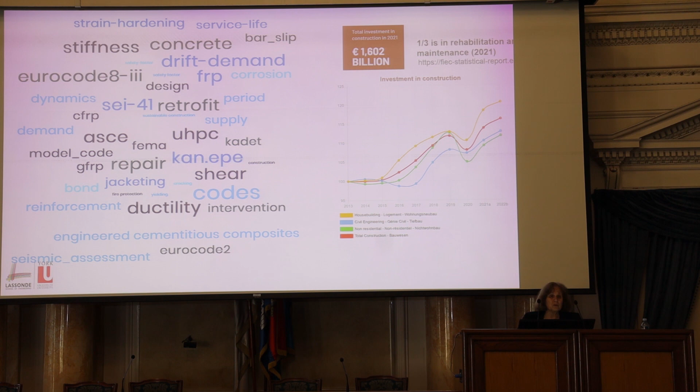However, the topic is a little bit on the graduate level for civil engineers graduating from undergraduate programs, and there is a lot of jargon out there from the various codes, approaches, and material industries. Therefore, to avoid some of this confusion, or to use a benchmark for further discussion, I want to begin this presentation with a few key points of reference.

Because the presentation is related to seismic retrofit, to seismic engineering, I wanted to first begin with a simple reference point: what matters in structural seismic response. Let's figure out first what matters in structural seismic response so that we may be able to see how we can fix existing structures with the opportunities provided by novel materials.

For a given earthquake and soil condition at a given city or site, we have the demand, that is, what the earthquake will require of the structure. This demand is usually described in the codes in the form of an acceleration response spectrum. On the horizontal axis, we enter the spectrum with the period of the structure, and on the vertical axis, we read off the acceleration that will happen at the top of the structure.

This, multiplied by the effective weight of the structure, tells us the force that the structure will attract during the earthquake. But the force is really not as significant as the amount of deformation the structure will develop, because that deformation tells us how much damage the structure will endure.

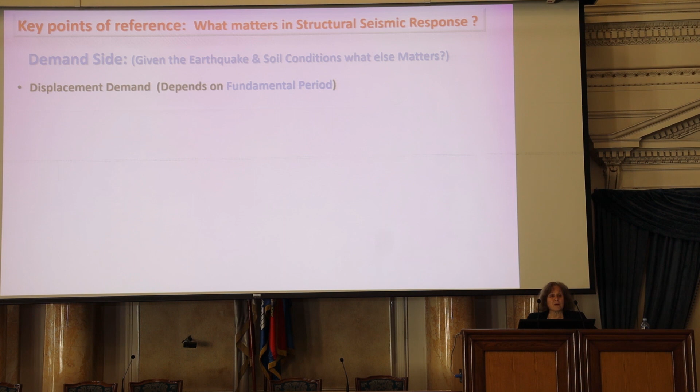That displacement is what we use as a criterion to anticipate the magnitude of damage the structure will develop. That's the first key point of reference. Given the earthquake and soil conditions, we have the displacement demand - what the earthquake requires of the structure in terms of displacement. Another important attribute of the seismic response is how the structure takes that displacement.

This is represented by the shape of lateral vibration, usually well approximated by the fundamental mode. Although it's not actually the fundamental mode of response, it does relate to it. If you see large concentrations of displacement in a single floor, you know that floor is where you anticipate damage. So the shape of lateral response tells us about the distribution of demands throughout the structure, and therefore the tendency for localization of damage.

Localization is a bad word in seismic and earthquake engineering. Anything that localizes means it's taken by one point in the structure altogether, and therefore that point will suffer while the rest of the structure just looks on.

So the morphology of the structural system determines both the fundamental period, which determines the displacement demand, and also the shape of lateral response, which determines the tendency for localization of damage. That was the demand side. In earthquake engineering, we're also interested in the capacity side - how much deformation capacity the critical locations with large deformation demands can take.

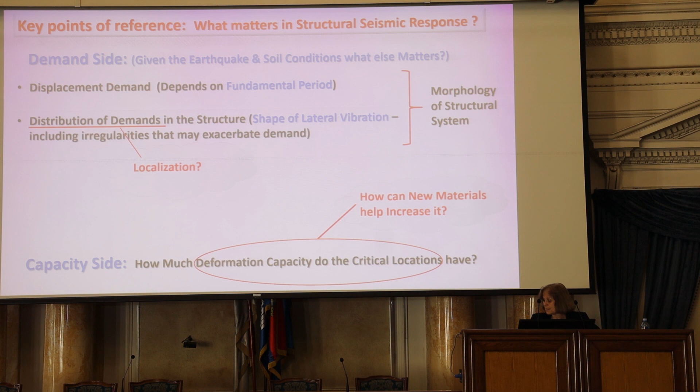This is where new materials can help us. How can new materials help increase this deformation capacity?

To understand the practical illustration of what I've been describing, consider these two houses. They were built in the same period in a part of Greece damaged in 2008 by a local earthquake, with the same method, technology, and period of construction. However, the bottom structure, which totally collapsed, had its lower floor without infills, whereas the upper structure was infilled in the lower floor.

Both were subjected to the same earthquake, and it was determined that the top structure had a period of about 0.2 seconds. Entering the spectra - the top is the acceleration spectrum, the bottom is the displacement spectrum - we see that in terms of acceleration this structure would demand about 40% of G, so the base shear would be 40% of G times the effective weight of the building. However, the displacement would be very small, less than 5 millimeters - so that's a very small displacement.

Whereas in the lower building, the period would be estimated at about 0.55 seconds - very large for a two-story building. Looking at the spectra, the red line at the top acceleration spectrum shows about the same demand in terms of acceleration, therefore the same force. However, the displacement would be 30 millimeters, and the columns of that building in the critical floor were not able to take these 30 millimeters.

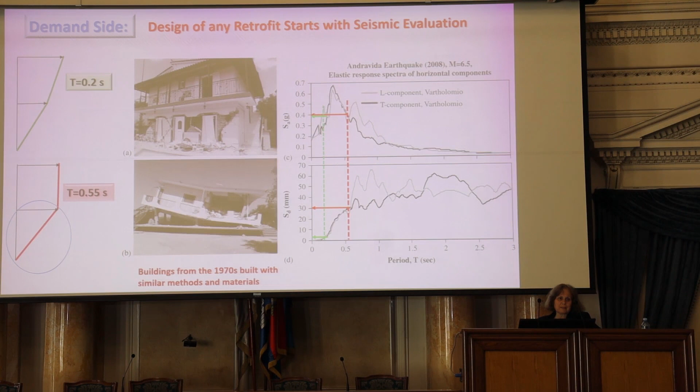The green shows the shape of lateral vibration of the top building. The bottom shows the shape of lateral vibration of the lower building. You see the concentration of the demand. This is the bad news.

In terms of retrofitting, when we start the process of retrofitting, the first job we need to do is to assess the structure, to evaluate it, to anticipate what it will be demanded to do during an earthquake.

There are two ways to go. One is to develop global interventions where such are needed, only if needed, with the goal to reduce the seismic demands. How? By addition of stiffness. When we add stiffness, we always add strength. Stiffness and strength are two sides of the same coin, you can't have one without the other. So by addition of stiffness and strength in critical locations, you can reduce the period and therefore the displacement demand.

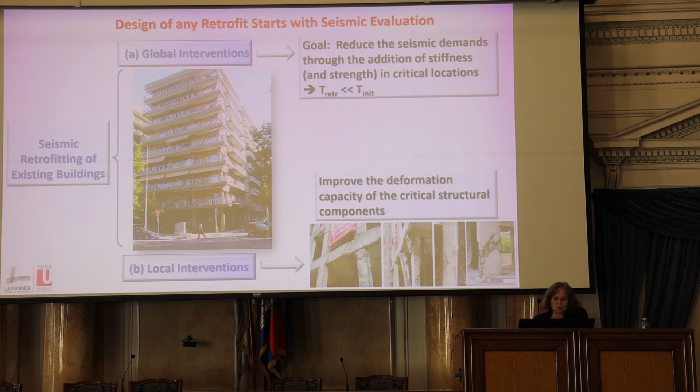The other approach, if needed, and usually that is always needed in older structures, is local interventions with the objective to improve the deformation capacity of the critical structural components. When you do global interventions, you usually improve the deformation capacity too, but that's not always the way to go, because global interventions are very expensive and intervene throughout the building, disrupting its normal function.

So we need diagnostics to determine which way to go. Should we go for global interventions? Are they needed? Or should we just stick to local interventions? What are the available diagnostic tools we have?

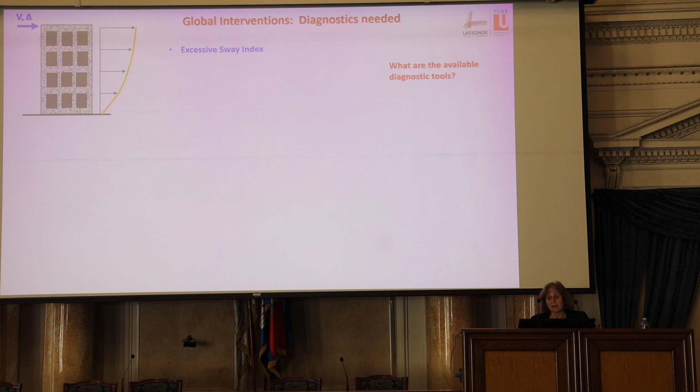The first you have already learned in your undergraduate reinforced concrete design course, with no mention of seismic design at all. It was called the sway index of a building. You all learned to calculate the sway index, and that's the most reliable diagnostic tool for earthquake engineering, for the assessment of a building. If a building is a sway type building, then it needs stiffness, it needs global interventions.

Another tool you have is to check the magnitude of the period. If you have an excessive, large period, then definitely you need to bring it down. You need to reduce the period. How do you measure the period?

There are instruments you can take to the field, place on the building, and read the period under ambient vibrations, usually generated by a truck passing by. You need to increase these magnitudes, because the actual structure during an earthquake will open all its cracks, whereas when the truck passes by, the existing cracks will not open. We do that by multiplying the measurement by the square root of 2, to account for the fact that the stiffness of the structure is reduced by 50% when an earthquake occurs.

So this is, for example, a multi-story building which was measured with the instrument placed on site. It was found that the period is 0.56 seconds. That's very low, of course, and the owner was very happy, but we are not allowed to stop there. We have to multiply by the square root of 2 to account for the fact that in an earthquake event there will be much larger intensity vibrations. So we end up with a period of 0.8 seconds.

That's less than 0.075 times the height of the building to the 3/4, which is the old calibrated expression that the Eurocode gives as anticipation for normal periods for such buildings, or the new Eurocode, which is being developed right now, which says we should go with 0.05 times h to the 0.9. In both cases, this building passes. So this building does not need global interventions.

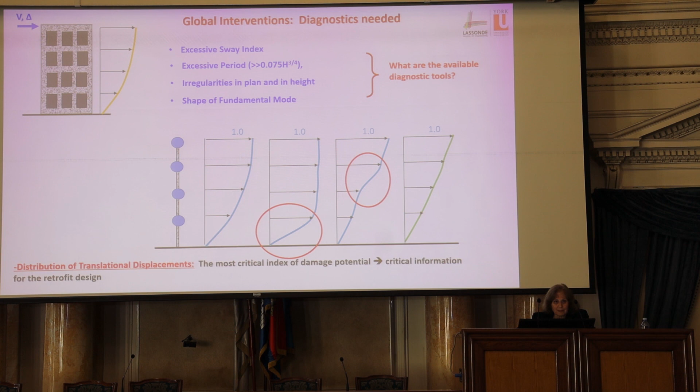Another way is to look at irregularities in plan and in height. If we have irregularities, there is a good chance we may need global interventions. And we can always calculate or measure, by placing the accelerometer at different heights of the building, that accelerometer I showed earlier, the shape of the fundamental mode. If you see irregularities in that shape, you know something is bad, because this is the most critical damage index. It tells you the potential for damage in the building.

A sudden change in the translational shape of vibration of the structure is the most significant effect on the generalized stiffness of the building, and therefore on the period, because the period of the building depends on the stiffness, on the generalized and the effective stiffness.

For example, the typical lateral stiffness calculation is done as follows. You take the stiffness of every floor, which comprises contributions from columns, from walls, and from infills. You sum those up, and you multiply them with the change in the lateral shape that is happening in that particular floor, but that goes squared.

And that creates a paradox in earthquake engineering: the weakest, softer part of the building controls the stiffness of the overall system. So if you have a floor that is weak, that is going to control. It's like Murphy's law: if anything can go wrong, it will. So if you have a soft story, a story where you have greater localization of deformation, that really represents the stiffness of the entire building.

So in this particular case, delta phi is the change in the lateral shape that is happening in the building, and it's happening in the lower floor. It controls the stiffness of the entire system.

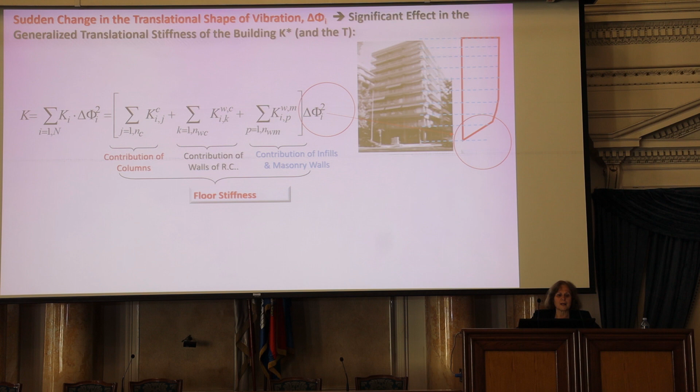So in redesigning the building, we have as a goal in a global intervention to modify the translational shape of vibration to a targeted shape, a shape that we like, in order to eliminate the tendency for localization. The more uniform the distribution of seismic demands that we will get, the better will be the response.

So what do we do? We have a good feeling of what the period should be. The Eurocode tells us what a period should be for a building of a certain height, so we can start with that. That's a good target value. If we are way above that limit, then we need to stiffen the building. So we can target the value of the period to be close to the value of the Eurocode.

That will allow us to estimate the effective stiffness, and then if we remember that the effective stiffness is the sum of the floor stiffness multiplied with the shape change squared, we know then what to change.

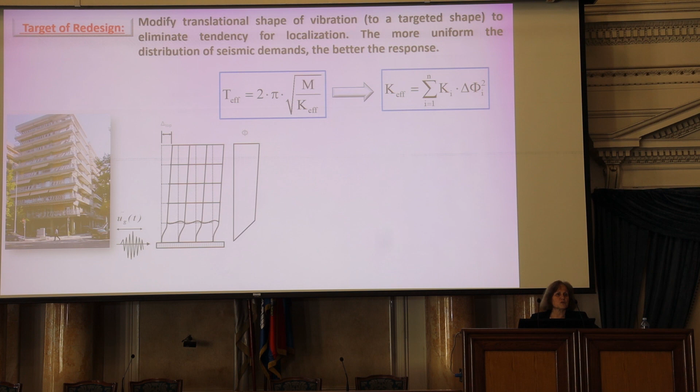And actually, the best thing is to aim for a uniform shape. Of course, we will never get exactly to the uniform, linear shape. But the closer we get to it, the more expensive the solution, so everything has to be done within reason. As a general guideline, we aim for a uniform distribution of strength and stiffness among the members in any given story in order to minimize the tendency for localization.

Here I show you the spectra that you saw earlier, but now I've plotted them differently. The vertical axis is the acceleration, the horizontal axis is the relative displacement, which you remember how we calculated it. The green region is the acceptable region of design. The green line represents the building with a period as per the Eurocode.

The yellow line represents a lower bound of acceptable design, the maximum value of period we are prepared to accept. The red line is the slope related to the period of a poorly designed building that we want to fix. So what we want to do is take this red line and bring it counterclockwise to fall inside the green region. The closer we go from the yellow to the green line, the better the retrofit.

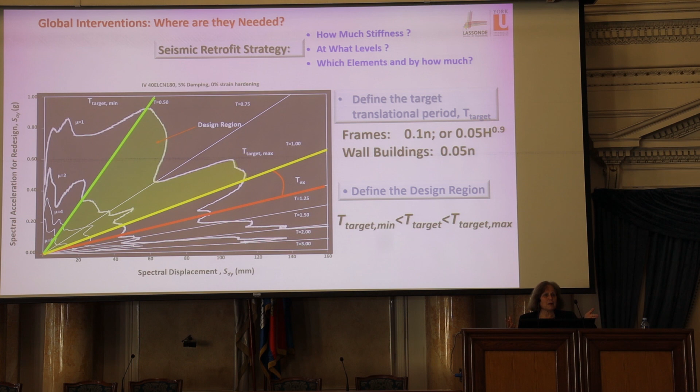So what should we target? We can target, for instance, a period for frame buildings of 0.1 times the number of stories, or we can target the period of the Eurocode. For wall buildings, we have to go to smaller values. And if we target this, and also decide what's the maximum allowable period we are prepared to accept, that defines for us the design region.

Having defined the design region, we are now about to design global interventions, and the question we need to answer is: how much stiffness to add, what should we aim for, and at what floor levels?

These graphs show what is the required effective stiffness of a multi-story building, and the dots correspond to different numbers of stories, given the period which enters the horizontal axis. So, given the period that you want, you can determine what is the effective stiffness for this particular building. Of course, this corresponds to a unit mass, which you then need to multiply by the actual mass of the building in order to convert it to a stiffness value.

And this here is a ready-made graph that you can use in order to determine the stiffness of the second floor compared to the first floor, the stiffness of the third floor compared to the first floor, the stiffness of the eighth floor compared to the first floor, that you need to add in order for the structure to have no problem in terms of seismic response.

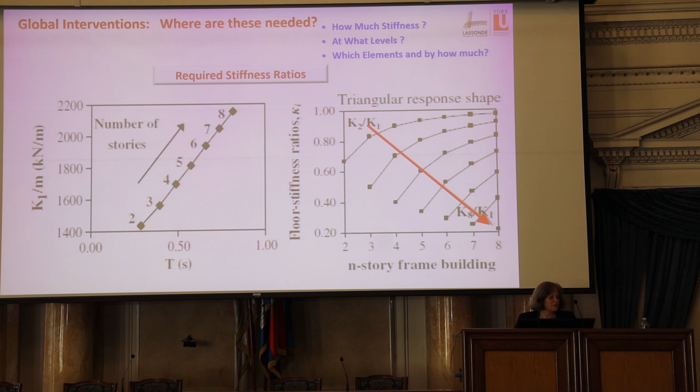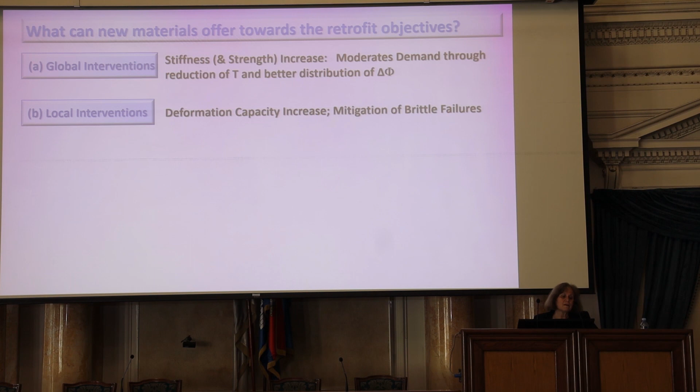Then the question comes: what can new materials offer towards this retrofit objective? What kinds of materials do we have at our disposal? Well, we have a number of new materials.

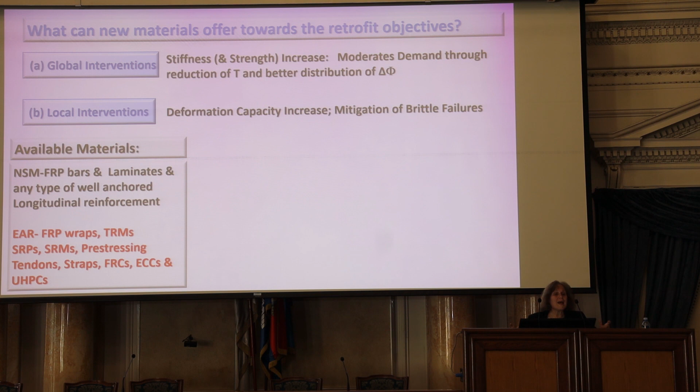First of all, we have FRP bars, which can be placed inside grooves - we call these near surface mounted bars. We have laminates, which can be introduced externally and anchored on a structural member. That's addition of longitudinal reinforcement, and any type of well-anchored longitudinal reinforcement will do for a global intervention.

For local interventions, we have what I have written in red: externally applied reinforcement in the form of FRP wraps, TRMs (Textile Reinforced Mortars), SRPs (Steel Reinforced Polymers), and SRMs (Steel Reinforced Mortars).

The steel now comes in the form of wires, pre-stressing tendons, straps, FRCs (Fiber Reinforced Concretes), Engineered Cementitious Composites (ECCs), and the most recent addition to the group is ultra-high performance concrete. These are concretes of extremely high compressive and tensile strength.

What are the available methods? We said that in a global intervention we now know exactly how much stiffness to add on every floor. What methods do we have? We said jacketing, but jacketing means we are changing the member dimensions. What else do we have?

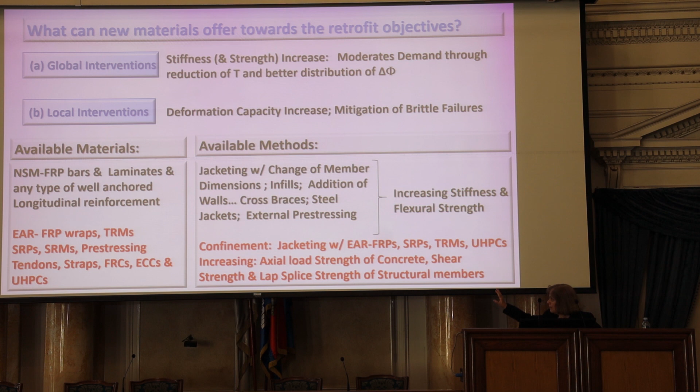We have infills - these are traditional approaches. We have addition of walls. We have cross braces - a very nice solution, particularly for certain kinds of building uses. Steel jacketing or external pre-stressing. All these methods written in black lettering increase stiffness and therefore strength, and therefore represent global interventions. In red, which are local interventions, we have confinement.

Confinement is the essence of a local intervention. So what do we have? We have jacketing with externally applied FRPs, SRPs, TRMs, or UHPCs. If there is time at the end, I want to talk to you a bit about UHPCs, because this is the future in retrofitting.

And what do we use them for? Well, we use them to address all the undesirable modes of failure in the building and also to increase the deformation capacity of components. We have a huge selection of materials right now in the category of FRPs, SRMs, SRPs, and TRMs.

The P, the last letter, stands for polymer, so you can have fiber reinforced polymers, steel reinforced polymers, or textile reinforced mortars, which are the TRMs, steel reinforced mortars - again, these are the SRMs. And they come in a great range: we have carbon, glass, basalt, aramid. We even have geonets, which are ideal for low-strength materials such as masonry, comprising polyethylene or polypropylene products.

The FRPs can come in the form of laminates, bars, pre-stressing tendons, and impregnated matrices - the matrices you see with the voids. So we have a huge selection, and before we talk about how we use them, let's quickly review some of the characteristics in terms of the durability of these materials.

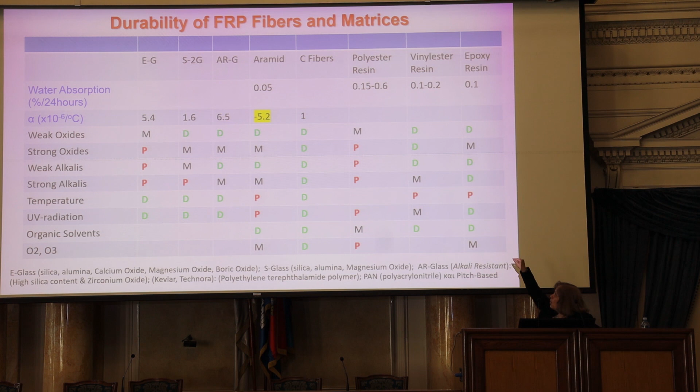In the horizontal line at the top, the first five columns represent the various types of fibers. Basalts are missing, but they are very close to glass. So we have E-glass, S-glass, AR glass (alkali-resistant glass), aramid, and C fibers (carbon fibers). The last three columns represent the various resins used to impregnate these materials, and the left column gives the various aggressive agents these materials need to resist. For instance, one is water absorption - we don't want our material absorbing water.

Their resistance in weak oxides, strong oxides, strong alkalis, weak alkalis, their response to temperature, UV radiation, organic solvents, and resistance to ozone. All these are considerations. I also give you the coefficient of thermal expansion, because that's important, particularly if you're embedding this material inside concrete. All our life up to this point has been based on the ideal marriage between concrete and steel, because they have the same coefficient of thermal expansion. But now with these materials we have to think, because they don't have the same coefficient of thermal expansion. Some may even have a negative coefficient.

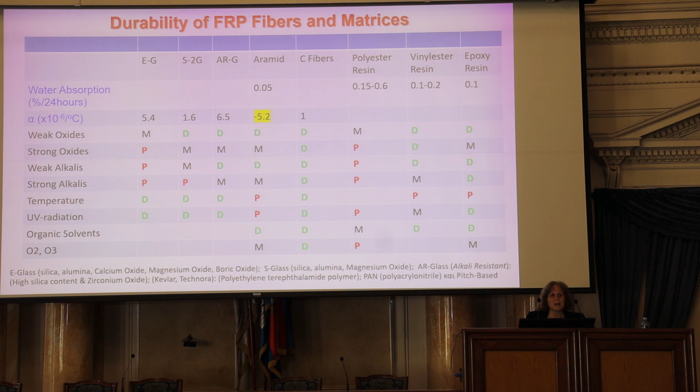So there is a color code here. The green letter D means that the material is durable to that particular aggression. The red P is that it has poor performance to that particular aggression, and the black M is indifferent, an average. By just perusal of the table you see that the best materials are, of course, the carbon fibers embedded in epoxy resin. So these are the best versions. Not that the others are not usable, but you have to worry about their resistance to various aggressive environmental agents.

So I said we have various materials. What they can be classified on is, of course, the matrix in which they are impregnated. For instance, we can have polymer matrices. These are very fast retrofits. The only problem they have is that sometimes they have a shorter service life.

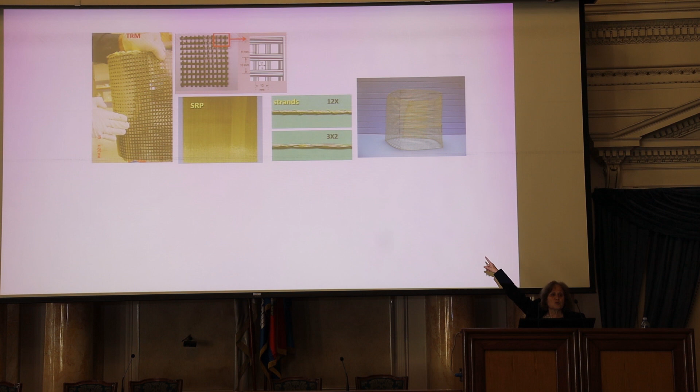And then we have mortars for matrices, which are inorganic materials. They are cementitious, and in these the various FRPs, TRMs, SRPs, etc. are impregnated. They have better durability and resistance to fire. These are typical fabrics that fall under this category, and you see also the metal strands which correspond to the SRP. The SRP is also shown in the next, second, lower picture. And here is the SRP after removal of a few strands, in order to make it perform like TRM, to be impregnated in cementitious materials.

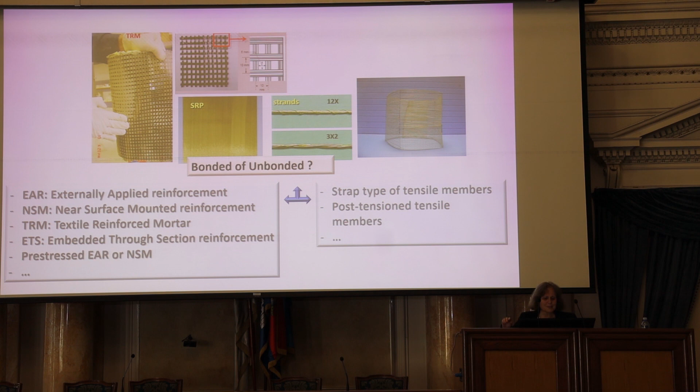And then you can have them bonded or unbonded. These are different ways to classify them. I already talked about near surface mounted solutions. If you are adding a lot of reinforcement, better use this option. And externally applied reinforcement, which is particularly useful when you do either external adhesion of laminates or wrapping around columns. And then you can have other solutions where you use straps or tensile members around the member that you want to retrofit.

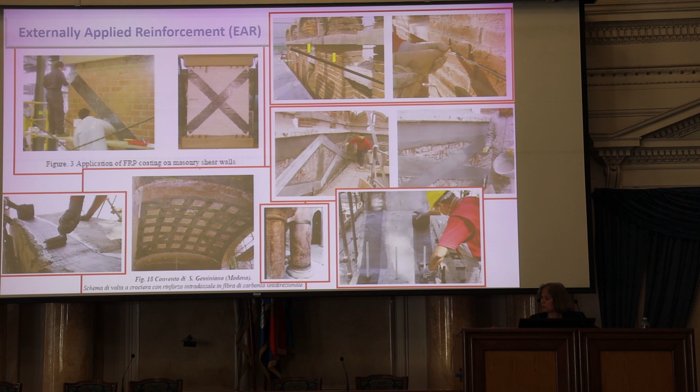These are images from different solutions, different applications. I'm sure you have seen several of those in the literature, and these are again solutions on masonry structures. I want you to remember that masonry can also be retrofitted in the same way. Here are some various solutions on masonry walls, because masonry is particularly useful.

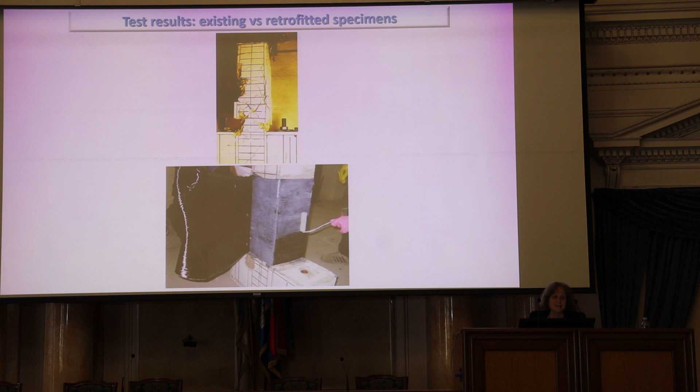Then we also know that they perform very well as jacketing devices for retrofitting of reinforced concrete elements. Here is, for example, a very highly damaged column with, you see it at the top, it has been damaged under cyclic load and then retrofitted below with CFRPs.

The problems become when you have flexural yielding in the first phase of response with extensive yield penetration inside the footing, which you have to do something about before you retrofit.

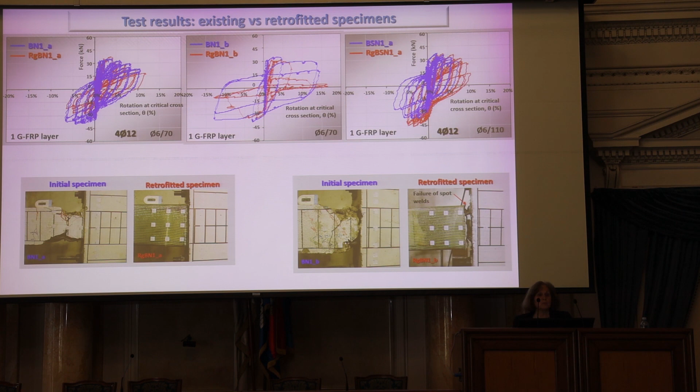This figure here shouldn't move. How do I show this? Maybe with this, right? Yeah, okay, sorry for this.

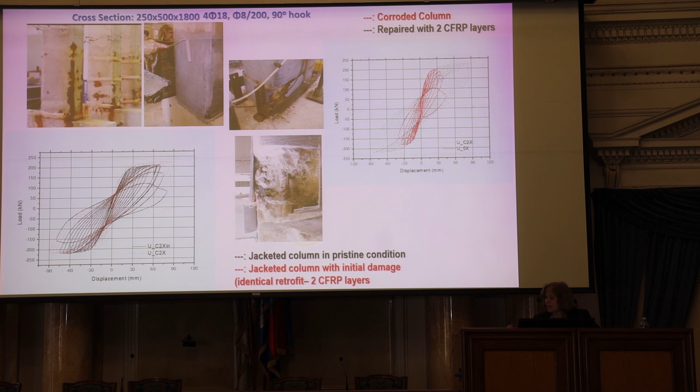Similar experiments were conducted on larger scale columns. The figure at the bottom shows in fine red line the behavior of a jacketed column, identical to the one shown in black, but the black one was not corroded. The red one was corroded significantly and then jacketed with two CFRP layers, and the response under cyclic load was significantly improved.

Now, all this experience, all this information has been going on for at least 20 years. There has been intensive research for at least 20 years, and it has been collected in the most recent FIB report on FRPs, Bulletin 90. The previous bulletin, Bulletin 14, was published in 2001. So there has been a lot of water under the bridge over these years, a lot of information collected. This bulletin represents the benchmark reference document for the development of the provisions of Eurocode 8 Part 3 referring to FRP.

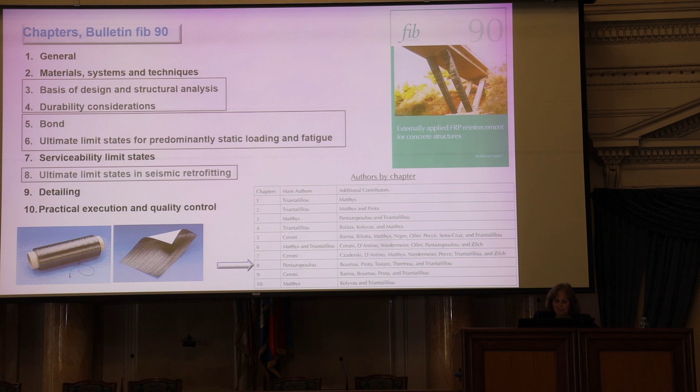So it's a useful document in order to see how the new code is going to approach this problem. Bulletin 90 comprises a number of chapters, including information on materials, the basis of design and structural analysis, durability considerations, bond, ultimate limit states for predominantly static loading and fatigue, and serviceability limit states. Chapter 8 is what we wrote on ultimate limit states in seismic retrofitting, and then there is a chapter on detailing. So I will just go very briefly over the chapters.

How are we doing in terms of time, Svetlana? We are okay? Yes? Okay.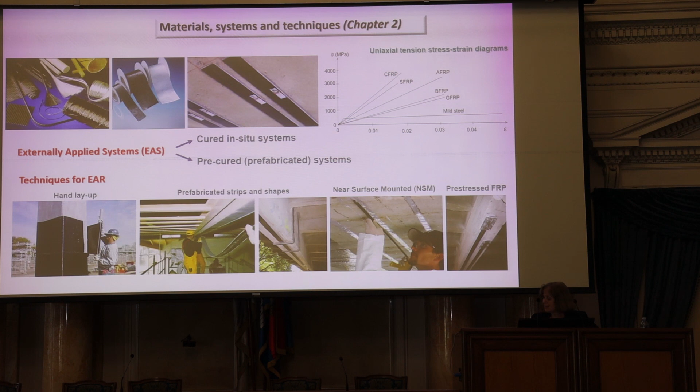There is lingo related to the way we apply the FRPs. For externally applied reinforcement, hand layup is what you see at the left, where they wrap a column. There are also prefabricated strips and shapes, near surface mounted reinforcement, and pre-stressed FRPs. There are specific techniques by which this is applied.

The basic requirement is, of course, that all the relevant codes are attended to: the basis of structural design Eurocode 1990, design of concrete structures EN 1992, the general rules for seismic actions and rules for buildings in Part 3 assessment of Eurocode 8, and the corresponding model code.

What are the concerns? There are two. The first is how to account for the effects of the additional reinforcement provided in the form of externally added reinforcement, and what is the development capacity of that reinforcement—how much of its strength can it actually develop. Because we may feel good using a material with a strength of 2,500 megapascals, but if the anchorage is not sufficient to support even 200 megapascals, that's all you're going to have: 200 megapascals.

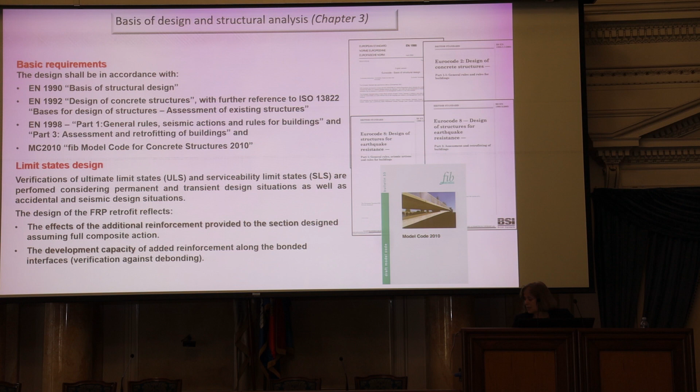Okay, so development capacity, which depends on the anchorage, is the key. So I am going to focus a little bit on FRPs, because FRPs is one point of reference. UHPCs, these cementitious materials, are the other point of reference in this whole range of materials, and everything else falls in between, combining properties from the two ends.

FRPs can increase your axial capacity, the ductility, delay bar buckling, improve the efficiency of lap splices, and of course increase the shear strength of a structural member, but also increase the diagonal tensile strength in beam column joints, and it does that primarily through jacketing, which provides confinement.

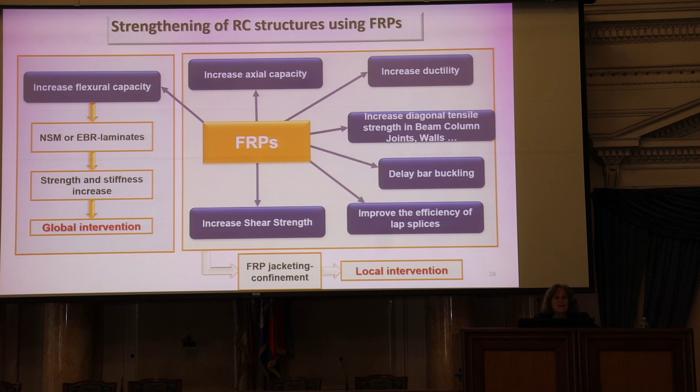So these solutions are all local interventions. FRPs can also increase the flexural capacity through the addition of externally bonded laminates or near surface mounted laminates or bars, and these are causing strength and stiffness increase, so these are global interventions.

Is this good? It is not good if the peak value is below the yielding of the main reinforcement. The main reinforcement has to be able to yield in all the structural components. That is our benchmark, our point of reference. Can we yield our main reinforcement?

If we cannot, we need to mitigate brittle modes of failure. We need to ensure that the existing main reinforcement will be able to develop its capacity. What is our basic method? It is jacketing through different materials.

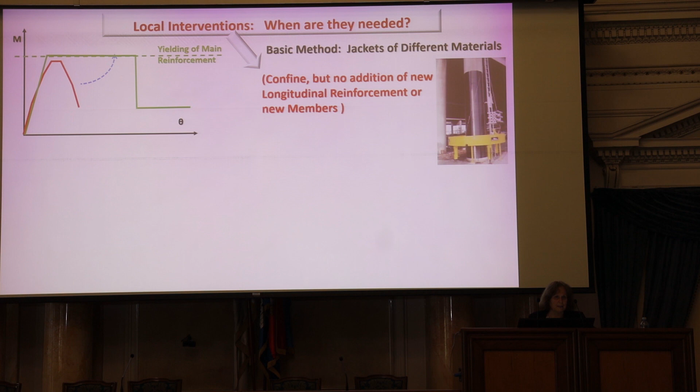And how does jacketing work? It works by just confining. It doesn't do anything else, it just confines. It does not add reinforcement. That's a local intervention.

The same exact model works if instead of an FRP jacket you have a UHPC jacket, that is a jacket made of a cementitious material. It's very easy to calculate the lateral pressure in these cases. And the same holds if you have a rectangular cross-section, the only difference being that there is an effectiveness coefficient, because things are not as effective in rectangular cross-sections as they are in circular ones.

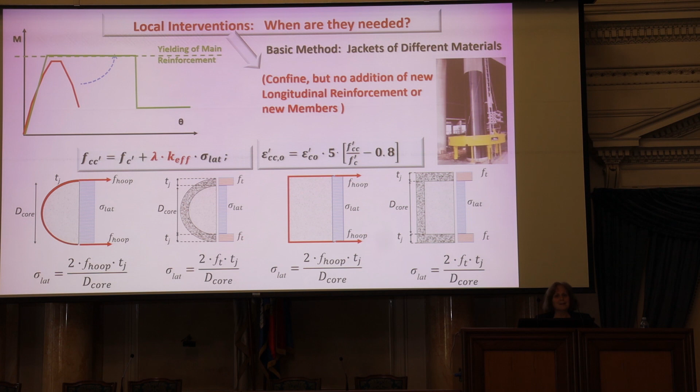So that's your first design clue. You know what you want in terms of deformation capacity. You can figure out how much jacketing you need. So if we were to stop the lecture at this point, that's a significant takeaway.

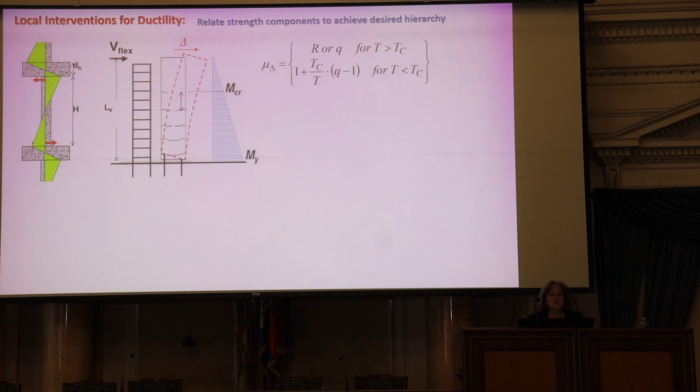So how do we work for seismic? For seismic, we need to somehow relate to what a structural member does during an earthquake. A structural member, let's say in a frame during an earthquake, does lateral sway. That means that it develops along its height a moment diagram that looks like the green diagram over there.

So let's understand this diagram. Here is a column which begins from this position to this position, and this is the typical moment diagram that develops during an earthquake in a column. Then there is another column above. Here is a beam, and what happens is a reversal of the moments of the column inside the joint.

So you can tell immediately by the slope of the moment diagram that you have a lot of shear in the columns, but you have significantly larger shear, maybe 10 times as large, inside the joint.

So, because of the symmetric conditions at the top and the bottom of the column, we work with half of the column because it's easy to solve. It has the same statics as a cantilever. So we can work with half of a column pretending that it is a cantilever, although it is not. It's just half of a swaying column.

And we can easily determine what is the ductility we want for the structure, because ductility means a certain amount of damage for our structure.

So for instance, a ductility of 3.5 means that we are going to have significant damage. A ductility of 1.5 means very little damage. So we can have a target for ductility in our retrofit.

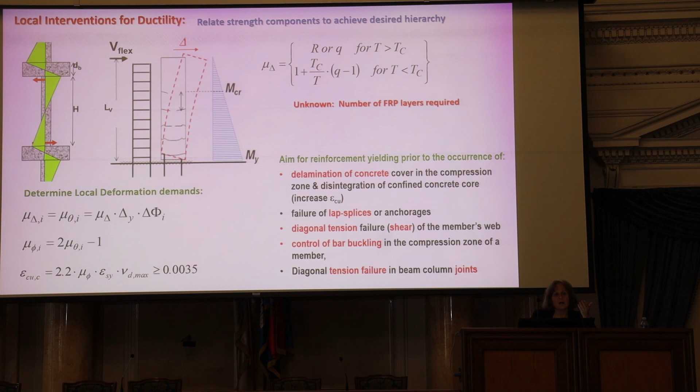Diagonal tension failure, wherever that might occur, in the webs of beams, columns, in walls, in beam column joints. We also want to control the bar buckling. So these are our design criteria for determining how much FRP we want and where do we want to place it.

Remember that sometimes FRP, instead of being wrapped continuously around the member, you may want to put it in layers. That's also acceptable, and it's actually good in some situations where you worry about corrosion, because you want to ensure that the structure is breathing, that you're not trapping inside moisture that can keep the corrosion cell going without you knowing outside.

As I already mentioned, all the money is, if you go for the confinement, is in the anchorage of this thing. You don't want to have premature failures of your strengthening at the anchorages. You have two kinds of anchorages. Wrap on wrap, which is the situation at the left, that is an FRP wrap being anchored on a substrate, which is FRP, or FRP on a brittle material, on a cementitious substrate. Obviously this is much more critical, because you can think of what scenarios can happen.

There, what you can lose is you can split the adhesive that connects one layer, anchors one layer on top of the other, but the adhesive is very strong, several times stronger in tension than concrete and in shear. So this is the most critical situation where the weakest link gives. The weakest link could be either the layer of adhesive or the cover of the concrete member. So you can have shear failure inside the cover.

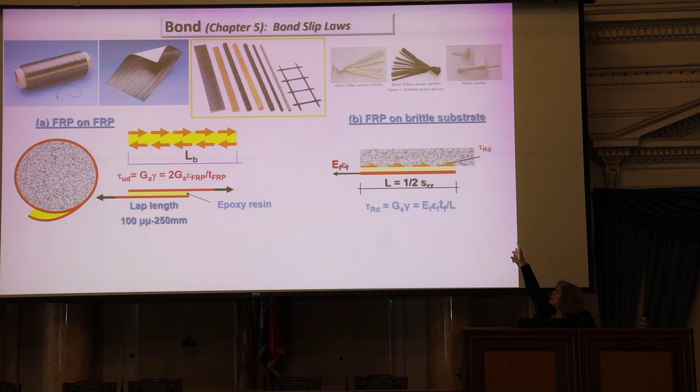You can anchor it with these chemical anchors that you see at the top. So you drill a hole, you put this with epoxy, and then you spread the fibers of the FRP all around. That's a very good way of anchoring. Or you can even use dowels.

The FIB Bulletin 90 gives you information about the bond strength of wraps and of near surface mounted reinforcement. The reason why you need this bond strength is because you need to be able, not just bond strength, you also get the slippage at zero residual bond. The reason you need this is because that quantifies the fracture energy of the substrate on which the FRP is glued on, and that fracture energy enters the calculations for the development length.

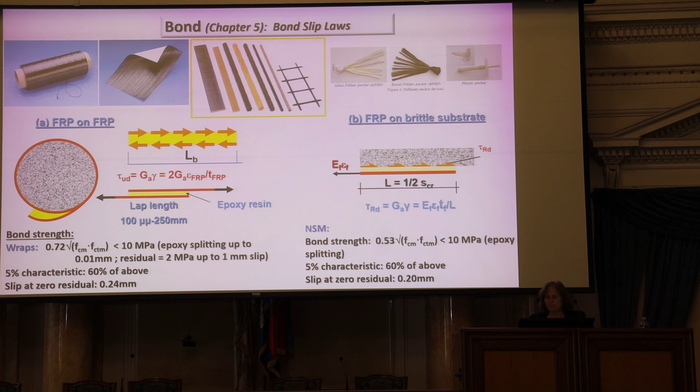So this is the typical situation where you have cracking inside the substrate. These are the typical conditions on site. The worst, the most vulnerable situations are situations where you have a laminate glued on the cover of a structural component.

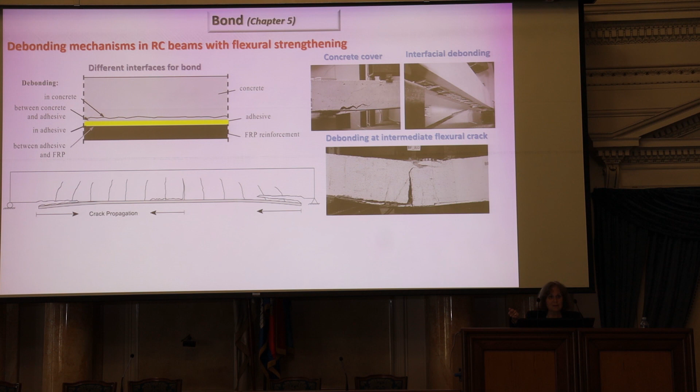You need to provide sufficient anchorage, if possible, with transverse wraps going over the end. The reason being that there you won't have zero moment, ever, because it stops closer than the end supports of a structural member, so you have a non-zero moment. And that non-zero moment means that you have curvature, and that curvature is causing the tendency for peeling of the laminate in the end.

Okay, so these are typical expressions that you will find in Bulletin 90 regarding the effective bond length and the FRP anchorage capacity at the end. You may also have the same phenomena happening near interior cracks - the beginning of delamination near an interior crack. So transverse wrapping over externally bonded laminates or chemical anchors are a must in order to enhance the development capacity and get rid of this design problem.

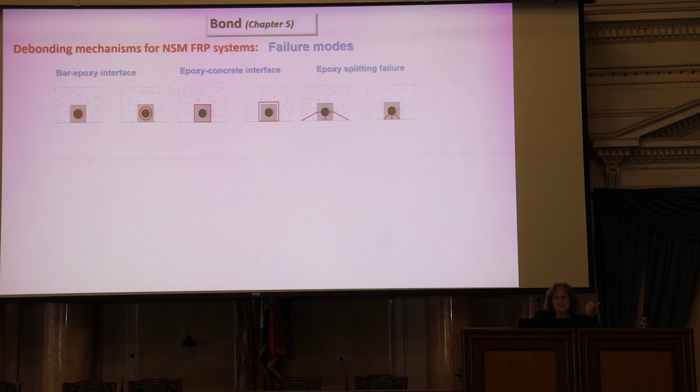Debonding mechanisms for FRP, near surface mounted FRP systems. What I showed you here in the previous slides was externally applied laminates. In near surface mounted systems, the resilience is greater. You can have a number of possible failure modes. For instance, you can have failure at the bar-epoxy interface, failure at the epoxy-concrete interface, or splitting failure that crosses the epoxy and splits the cover, the adjacent cover. So all sorts of such things may happen.

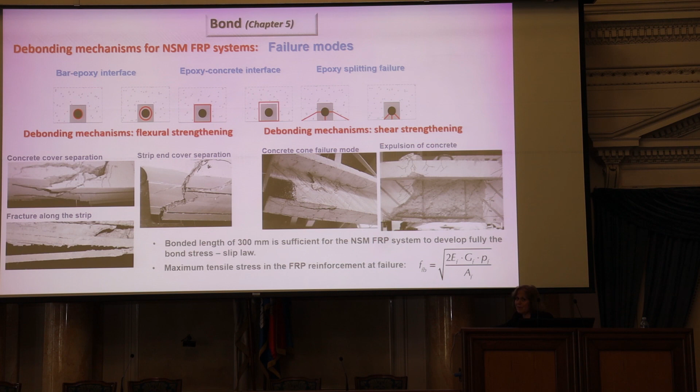The maximum tensile stress that your FRP reinforcement can take at failure is obtained from this expression, where here is the critical crack path that it can develop, and here is the fracture energy of the material in which it is encased.

You can use a smaller amount, which is determined as the lowest value that would lead to failure from among a number of possibilities. For instance, buckling of interior reinforcement can cause a rupture of your FRP. So you have a limiting strain capacity of the FRP, which is related to the setup that you're using, and that buckling strain capacity limits how much of your FRP you can use.

Dilation of the encased concrete can rupture the FRP, particularly at the corners, which you saw we chamfer - we round them up to minimize the stress concentrations - or we can have debonding of the FRP layers. All these values are strains that are limited by the mechanics of the failure mode, and they are generally less than what the FRP can offer.

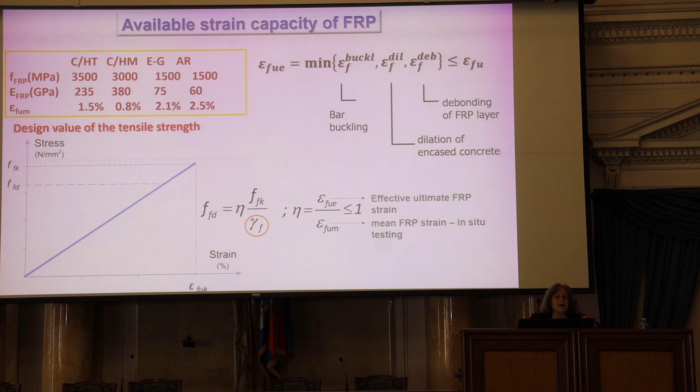And as I said, there is another factor, eta, which is reducing the availability of strain capacity of the material, accounting for local effects, for instance, local rupture.

Okay, in terms of retrofitting for flexure, flexural retrofitting means that we are into a global intervention - we are strengthening the structural member. Not a very good idea, but sometimes we have to do it. Not a very good idea for seismic. For other situations, it is, of course, necessary.

And of course, in order for this to work, it's got to be anchored from the point where you need the FRP, which is at the critical section at the base, further into the footing. Unless you do that, this is not flexural strengthening. So the locations that they show in red are the points where the FRP is expected to develop its peak strength.

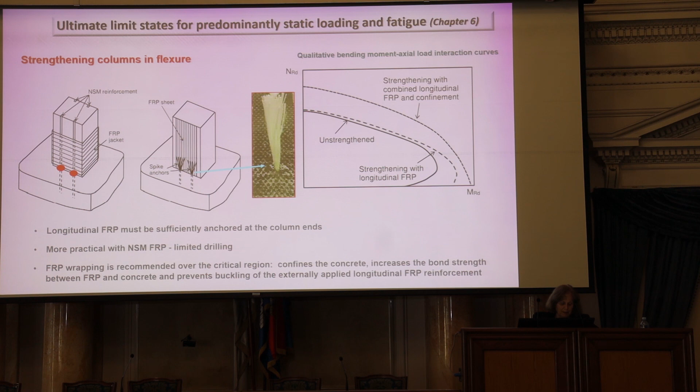So more practical is, of course, to use near surface mounted FRPs. These require limited drilling, and of course you must always worry about the anchorage.

In designing this, you need to worry about the hierarchy of the failure modes. You need to get rid of brittle modes of failure - brittle mode of failure, for instance, is a shear failure. You need to increase the shear strength of your member to such a level that it will never be an issue before yielding or before reaching the flexural strength of its component.

If the serviceability limit state is governing your design, you'll end up putting a lot more FRP than if an ultimate limit state was controlling your design, and therefore you need to take additional measures to strengthen against brittle mechanisms of behavior. And remember, your bond at the interface is always limited by what the concrete can do.

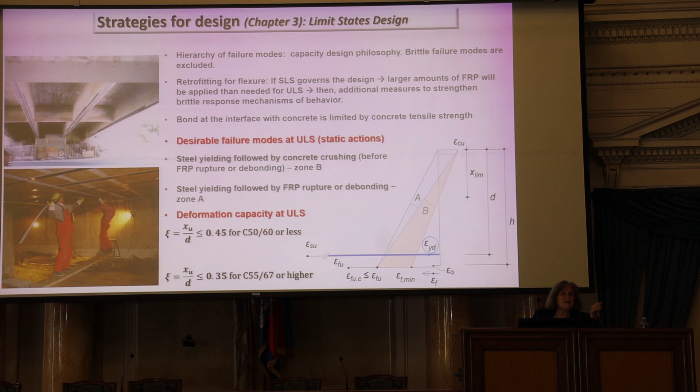The depth of the compression zone should never be greater than 0.45 in order to have some ductility in your failure at the ultimate limit states, for concretes with strength of 50 megapascals in cylinder strength or less, or less than 0.35 if you have higher strength concretes.

For seismic applications of global interventions, whether near surface mounted—shown on the very left—or attachment of laminates at the extreme faces of the structural member, you have to ensure the resiliency of the retrofit, and you ensure that resiliency by transverse wrapping. You have to ensure that this is not going to fail under repeated cyclic loading.

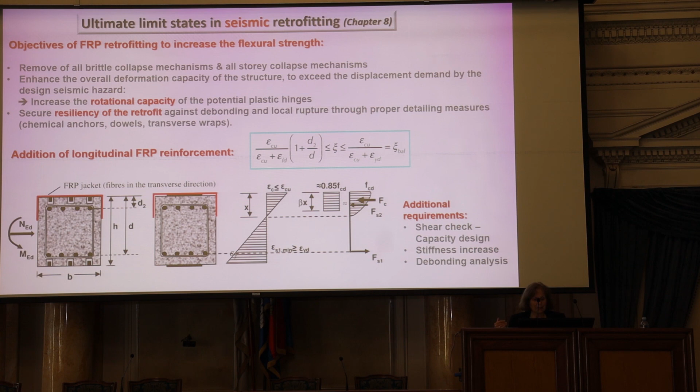In terms of the ultimate limit states for seismic, you also need to ensure that your member will develop its rotational capacity. The rotational capacity can be checked by considering the wrapped concrete, the encased concrete, in its enhanced state. Wrapping increases the compressive strength and the strain capacity of the material. If you account for this, you will increase your rotation capacity, and that will also enable you to satisfy the ductility requirements we mentioned earlier.

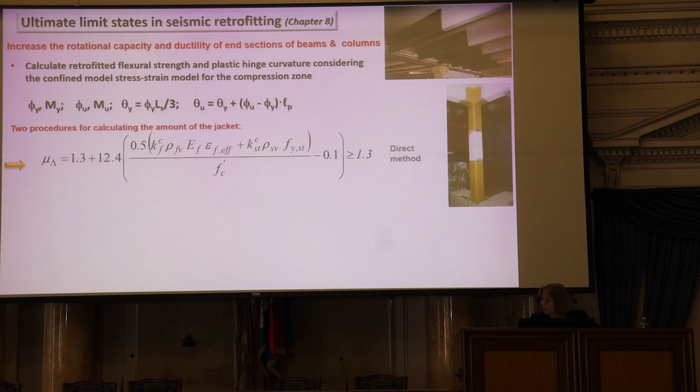There are two ways to go about this. Remember, the objective is always to determine how much FRP material you need. You can use this empirical expression that gives you the displacement ductility as a function of the FRP material you're using—this is the FRP contribution. So if you have a target displacement ductility you want to develop, you can figure out rho FV, the volumetric ratio of your FRP material, in order to achieve it.

Or you can go with Eurocode 1998 Part 3, that's Eurocode 8 Part 3, which includes the expressions for rotation capacity by Professor Fardis, in which case the contribution of the FRP is this last term, and that then has to be solved iteratively.

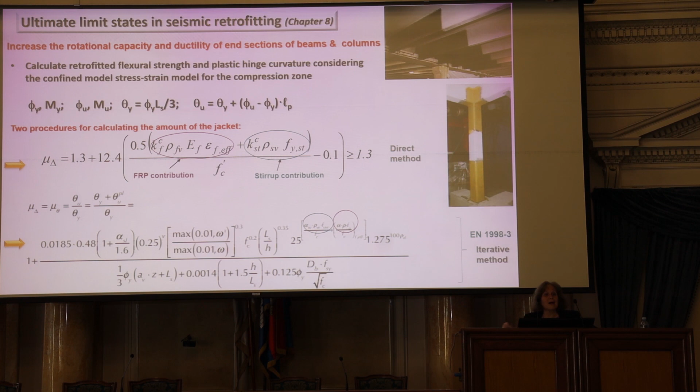Another thing we said is you need to mitigate all brittle modes of failure. Brittle modes are, as I said, shear failures. To enhance the shear strength, you can wrap the structural member, either with continuous wrapping or in layers.

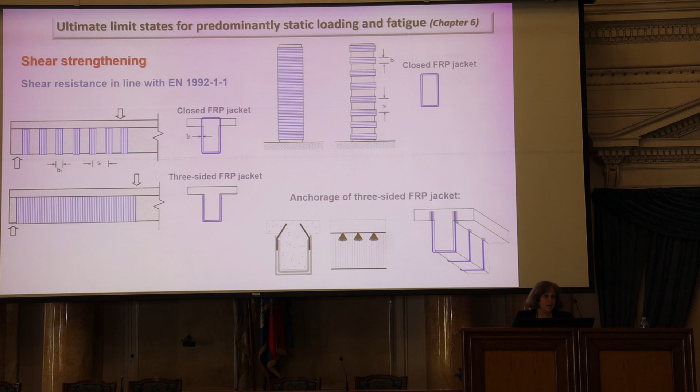If you cannot do a closed jacket, as shown at the top, but you have to stop at a certain depth into the compression zone, then you use chemical anchors or other forms of anchors to ensure that this FRP transverse reinforcement will be able to develop its strength.

To determine how much you need, you go with the classical approach for shear design. You have an initial shear resistance, that's the VRd,o term—that's what you have. And VRD is what you want, how much you need. The difference between the two is what the FRP needs to take. In order to determine how much the FRP needs to take, this is the expression for the FRP contribution, and in that expression the unknown is rho, the amount of FRP you need to add.

Whether you go with a full fabric or with strips, you need to account for the anchorage conditions of your FRP jackets in order to see how much force you are going to put into them.

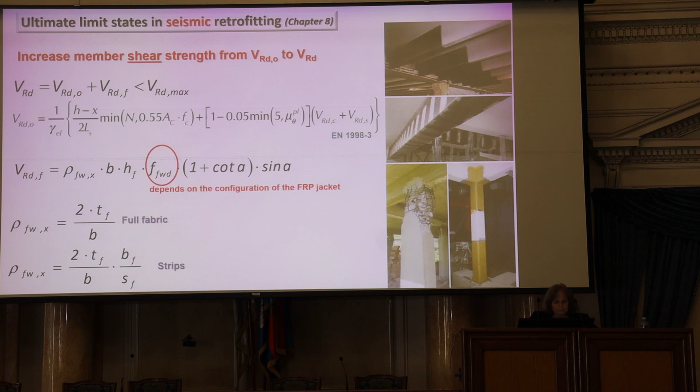Another thing that works with FRP is clamping of lap splices. You have two bars lapped, usually at the base of a structural member in old construction. If this is not clamped by transverse reinforcement, it's going to slip and you won't ever be able to develop the strength of your reinforcement. FRP jackets help with this, because as the bars slip against each other, they dilate—they try to create space in order to slip because they are ribbed—and that slippage engages the transverse jacket.

By engaging the transverse jacket, this returns back to the bar through a confining pressure. So there is a very simple frictional mechanism that enables the clamping action.

You can actually determine how much bond strength you need in order to develop your reinforcement. There is a term, the last term in this expression, which tells you what is the jacket component. Therefore, if you know what strength you need, you can figure out how much jacketing you need to add.

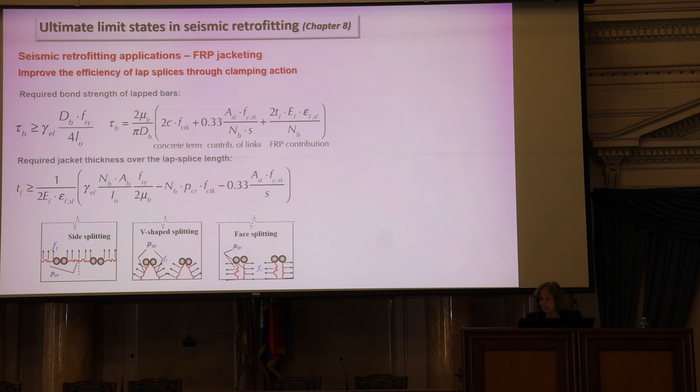You also need to preclude buckling of the encased reinforcement. That's the most difficult thing to do, because reinforcement in compression tends to buckle if you don't have frequent ties. So you can do two things: either eliminate the cause of buckling,

What's the cause of buckling? A lot of lateral sway in the building. You reduce the displacements of the building. That's a global intervention. Or increase the deformation capacity of the reinforcement.

How? By confining the concrete next to it, so that the concrete can take a greater share of the force and a lesser share will go to the compression reinforcement, and therefore the buckling onset will be delayed. It will never be precluded. It will be delayed though.

Remember that as the reinforcement buckles, it tends to create stress concentrations on the jacket and therefore tends to cause rupture.

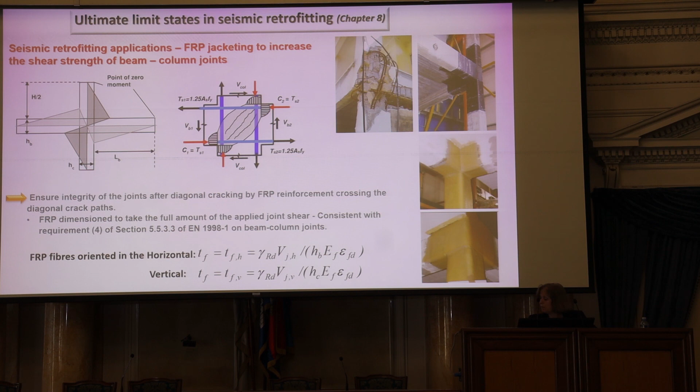There is, of course, the strengthening of joints, but I don't want to stay too much on the joints because that's a very esoteric kind of subject. There are ways given in Bulletin 90, which gives you how to detail this. This is the FIB Bulletin 90.

A new bulletin is under preparation with examples on these applications, on this guideline framework. Very soon you'll have a book of examples that will tell you how to use all these guidelines. The guidelines are in line with the Eurocodes and with Model Code 2010.

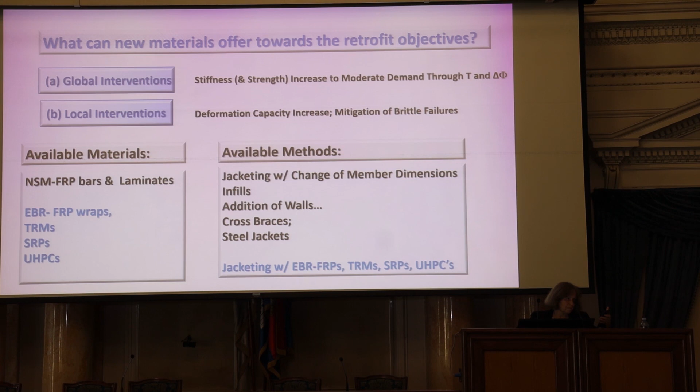At this point, I think I should stop, although I had a few slides on UHPC materials. Svetlana, should I stop? Just if you have interest of time, maybe just a few minutes, a little bit of explanation, but just a few.

A few years ago, the engineered cementitious composites came about. What is interesting about these engineered cementitious composites? That they are strain hardening in tension. That's unheard of for concrete.

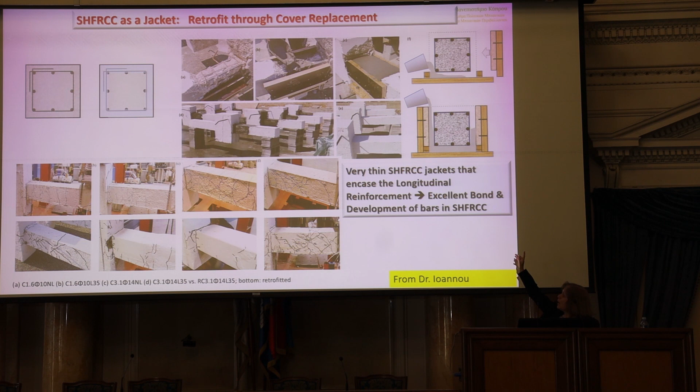There are several such materials, but I don't want to stay too much on these other than to show you a picture of retrofitting with this class of materials by just replacing the cover of the structural component, and you can enhance significantly the strength.

However, recently, a totally new version of engineered cementitious composites has come about, which is called ultra-high performance concrete, which combines the characteristics of self-consolidating concrete, fiber-reinforced concrete, and high-performance concrete.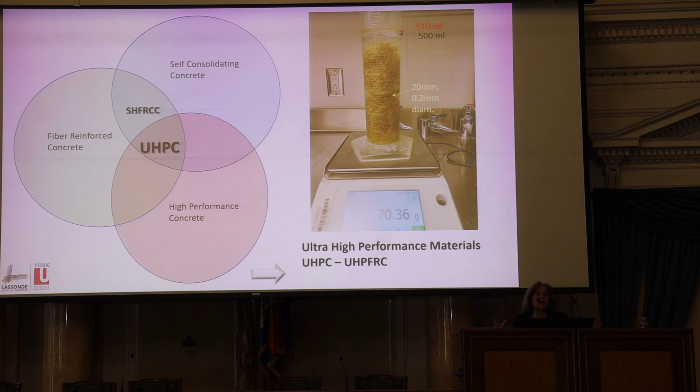They contain fibers. For instance, this cylinder gives you the volume taken by half a liter of water. The lower line, the black line where it says 500 ml, gives you half a liter of water. The red line, just a bit higher, is what happens when you add 2% of the volume of fiber. So you see lots of fibers, but they are only 2% of the volume of the material.

What kinds of fibers are these? They are very fine fibers. Their typical length is about 13 to 20 millimeters. Their diameter is a fifth of a millimeter, very fine. And here is a concrete that has been reinforced with these fibers.

How does it perform? The top graph shows you the evolution of the compressive strength of this material. The blue line is the laboratory value, the orange column represents the field value. We are talking about strengths in the range of 180 megapascals in compression.

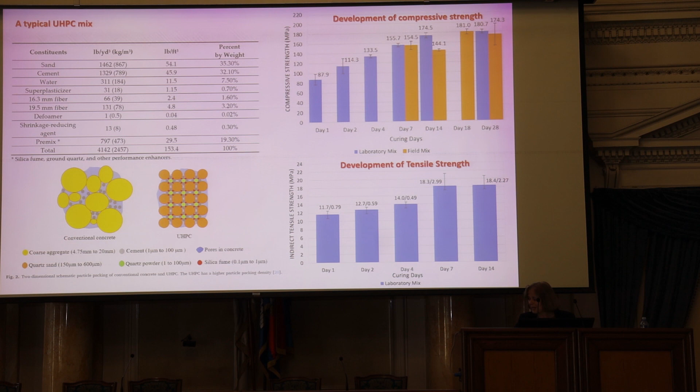These are huge strengths. The most interesting aspect, though, is the tensile strength. You see the evolution in time with curing of these materials in tension. We have strengths in tension of the order of 11 megapascals or more. So suddenly, this has opened up huge opportunities, particularly in bridge engineering.

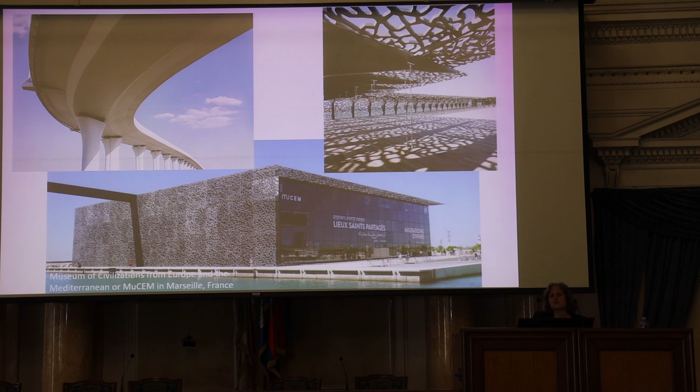The number of bridges constructed or retrofitted with UHPC is continuously increasing. It has also given huge opportunities in architecture, with many interesting monuments and architectural signature structures already built. This is considered a truly new building material that architects and engineers use to push the limits of their design. Here are different cases of monumental structures throughout Europe and North America.

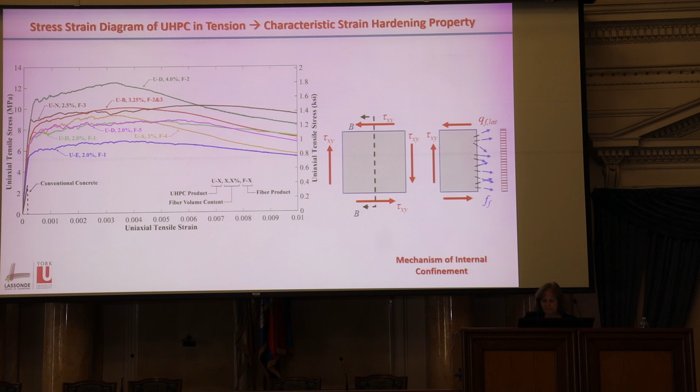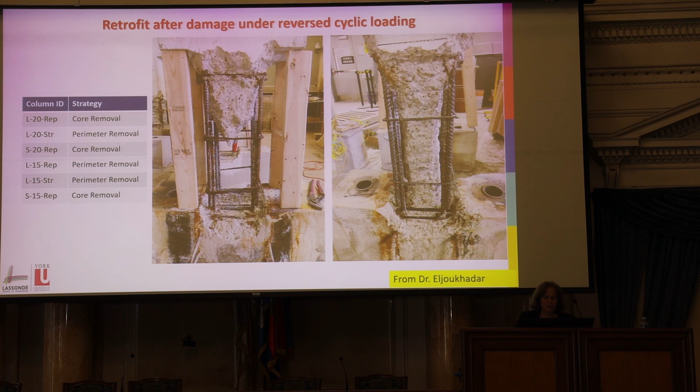I want to stop at this point and thank you very much for your attention. Sorry for taking all this time, and I hope that you found some interest in all this.

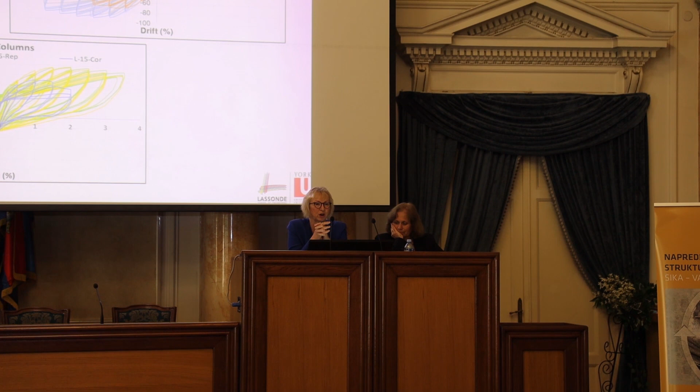I really want to thank you for this excellent presentation, and I'm happy we had this extra time because at the end we heard something really impressive about these new materials. The first question I want to ask is, what is the current availability of these new materials, UHPC?

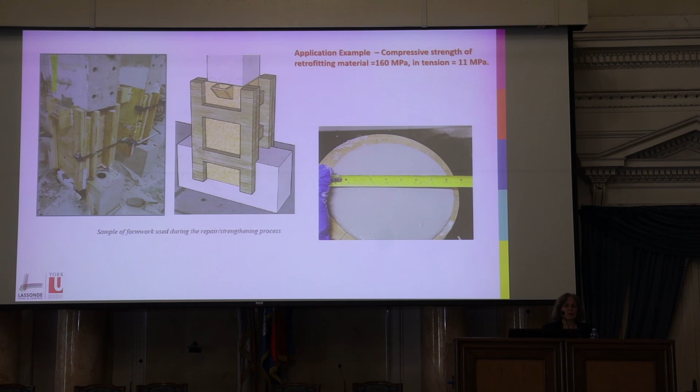There are lots of materials out there. They come pre-packaged. Sika has one of these materials, but there are several other products, and they are widely available for bridge engineering in particular. What we are doing is using them as a retrofit opportunity for cover replacement—we just remove the cover and replace it with this. It's highly flowable, contains 2% steel fiber, but is extremely flowable. If you look at this picture, this is the two-minute flow rate of these materials, and as such they are very useful for casting jackets.

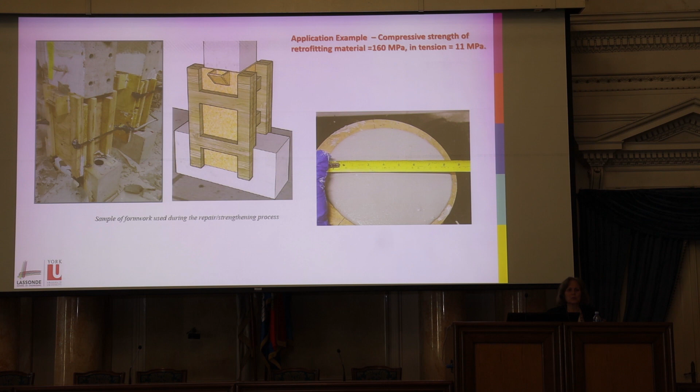They are very available. Actually, the French were the pioneers in this. While the rest of the world was sleeping, the French had already issued a Eurocode for these materials, Eurocode 2. So they are out there.

Yes, and about the price? The price is expensive, but of course it's coming down. It's the same thing as with the FRPs—when we started with FRPs in 1995, they were expensive. As more and more non-proprietary materials enter the market, the prices go down. I have included in the slides one mix design, for instance, for this. You can make it.

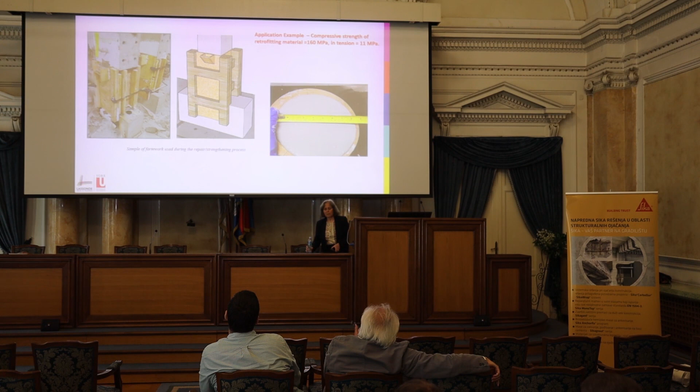Going back to the beginning of the lecture, I want to ask about the strategy for approaching existing buildings, in terms of making criteria for what is to be retrofitted and what is to be strengthened. For example, in our current regulations, if a building is for public use, it should be brought to the current demands of the Eurocode, which is very difficult in some cases. Other buildings not for public use should be kept in the shape they were designed in.

What are the experiences you'd recommend? Experiences from Canada or other countries, I know that's connected with money and economic strength, but what is the experience in this?

Well, that's a general framework where you want to bring buildings to current standards, meaning the building should be able to withstand current seismic demands. Suppose you want them to have a ductility of 3.5 - there are ways to increase ductility without changing the whole building if you don't need to. You need to determine whether the building needs global strengthening or whether local interventions will do.

For public buildings you're practically obligated to do this kind of sectioning, but that's not the case for some private buildings. That's very different, because there were a lot of questions after the Turkey earthquake - here in Belgrade, all the press was asking if Belgrade buildings are safe. Of course it's a completely different situation, but there's a big question: should this matter be left only to local investors and their private money, or should there definitely be a guideline from the state on how to do that?

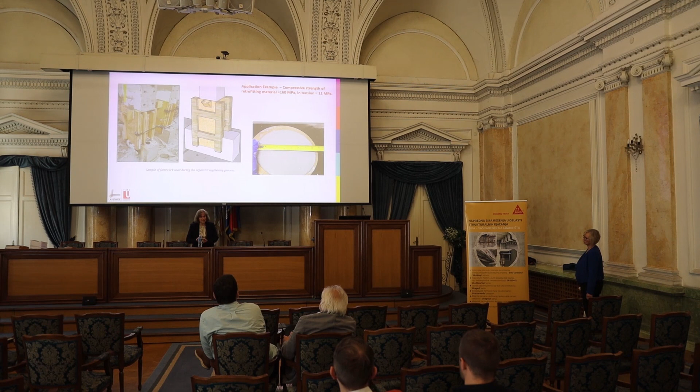This is one of the limitations of epoxy if you use epoxy resins. But epoxy resins perform better under heat than vinyl ester or other resins. So if you go with the best epoxy, your life will be long enough for the structure to be evacuated. The objective should be explicit in your design: the structure should be able to take its own weight and all its permanent loads without the FRPs, so that if the FRP stops working, the structure will still be able to carry its self-weight.

Okay, thank you. Thank you very much. Thank you. I think in the interest of time, we still have a presentation by Sika, so let's move on.